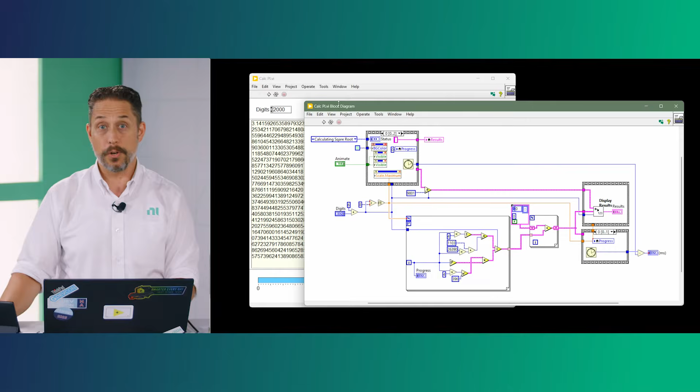Now, this was someone else's code. It's relatively cleanly made, but I didn't know how to necessarily interpret it. So I figured, hey, let's go to Nigel and see what Nigel has to say about what we've got.

So if you're a LabVIEW developer, the thing that you want to be able to do, if you bring up context help by pressing Control-H as a hotkey, you should be able to see here very easily we have a discuss with Nigel option. So when you click on that, you'll see that Nigel does show up.

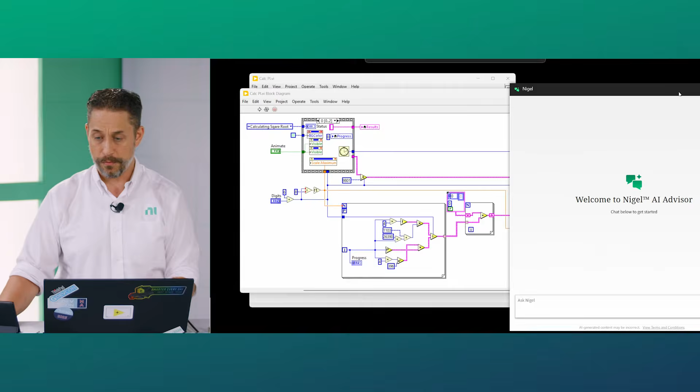It will log in automatically if you've already done it before. And now you can see that it's starting to chew on the VI that you're working with. And that's a great capability. That's truly differentiated. You're only going to get that with Nigel. And so it's going through the code, it's uploading it, and now it's starting to analyze the different parts and pieces of that individual algorithm.

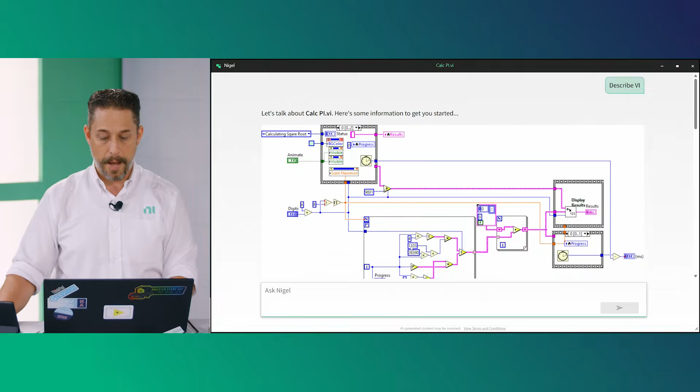You may have seen this before at NI Connect, but I really wanted to call out some of the unique things it's doing, because it's not just interpreting the names of the controls and indicators and other things like that. It's actually thinking about what the code is doing. One section that's particularly interesting is where it figured out what type of algorithm we're using to calculate the many digits of pi. This isn't a presentation about the different algorithms available, but that really impressed on me the level of thought happening in the interpretation of your LabVIEW code, which should make your life a lot easier as you start to use tools like Nigel.

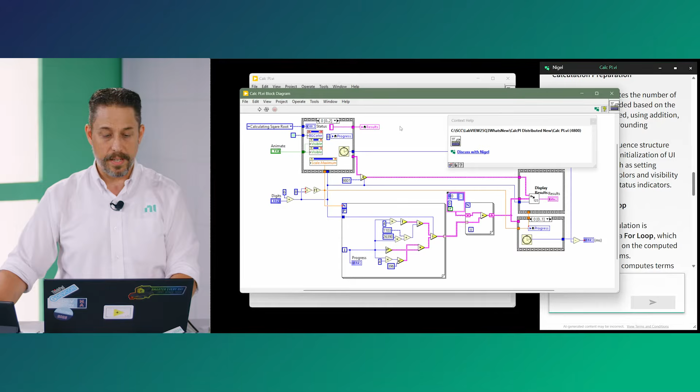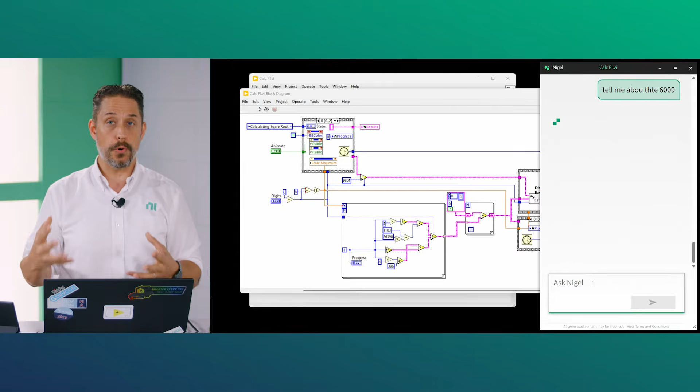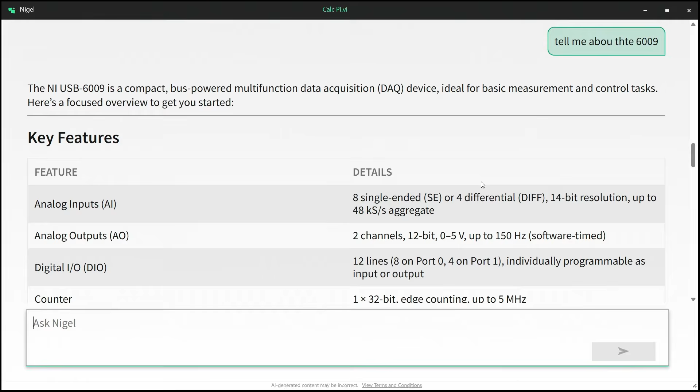Some other things Nigel can do: not only can you discuss the specific VI, but you can do something as simple as asking, tell me about the 6009. It will figure out, well, I'm an NI person working with NI products, and the 6009 has some relevance. In short order, we'll see a display that starts to talk about the USB 6009 as though you had actually gone to ni.com and searched for those results. Now that Nigel's finished calculating and figuring out what we meant by such an obtuse question, you'll see it figured out we were talking about the NI USB 6009, its features, and went from there.

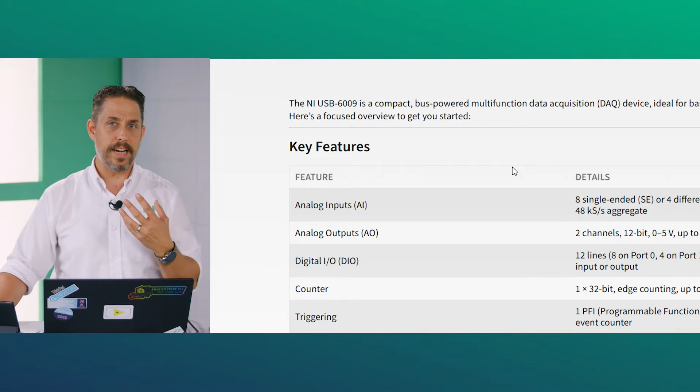This is just another illustration of what Nigel brings to the table above and beyond your typical chatbot, bringing a lot of value to those using it. Another unique thing about Nigel is that it's going to continue to get better quarter to quarter as we release new software and continue updating the algorithms and overall model available on the web. So stay tuned, continue to use Nigel, see what works well, and expect it to keep getting better at a rapid pace, much like most of the rest of the world of AI chatbots.

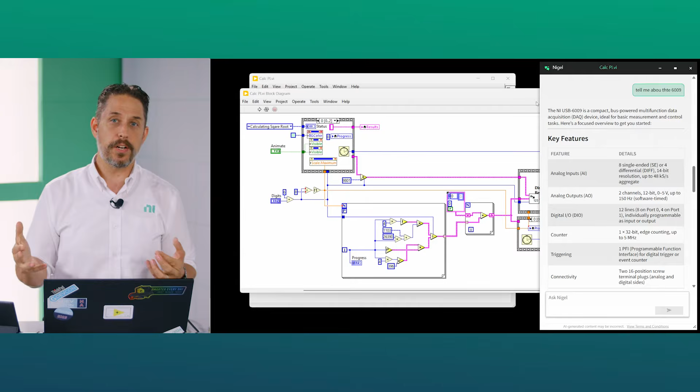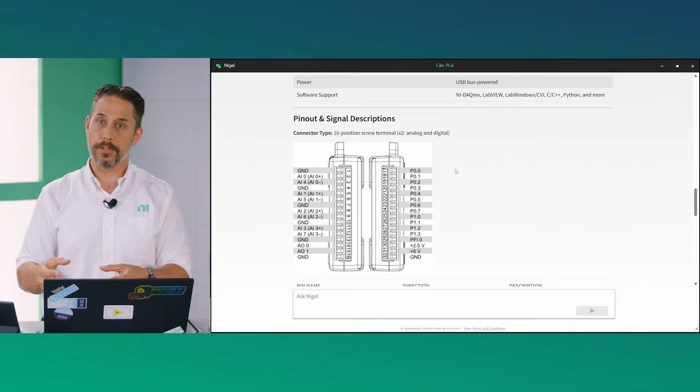Now that Nigel has finished figuring out what we implied by some random numbers, you'll see it quickly identified that the 6009 is an NI product and starts to talk about things. Some other interesting capabilities: it even goes through and tells you the pinout of the individual device you've got, once again accelerating the time to get the job done, use the hardware you've got, and use the software. Nigel is made to work with LabVIEW, made to work with TestStand, but also made to work with test and measurement at large, or the NI hardware platform.

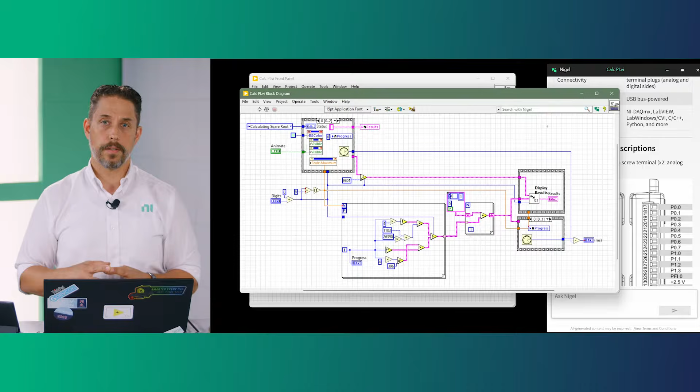The workflow I've shown you so far is basically asking about an individual VI or bringing Nigel to the forefront. But one other thing worth noting is that on the diagram, we have a search bar up here. So if you're somebody who works with Python and want to understand, hey, where's this common function, Nigel understands what you're talking about and connects you with parts of LabVIEW that match what you're looking for.

A tuple is akin to a cluster in LabVIEW, so if you're talking about that, you can see we have some very specific things that LabVIEW has called to the forefront. If you hover over an individual element, it will give a little bit of the rationale for why that item was chosen. It's just things we're trying to do to connect you to Nigel within the environment and get you to whatever operation you're looking for.

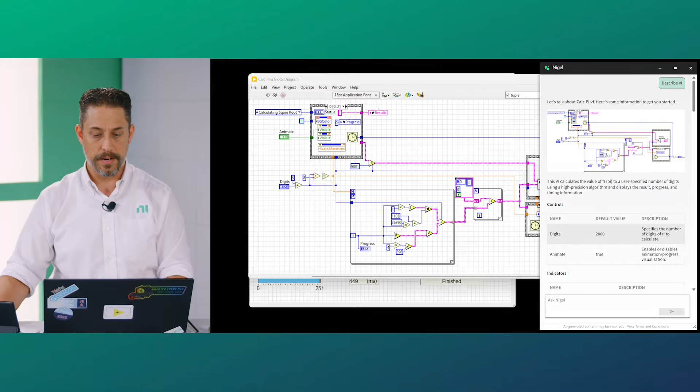So now that we've talked a little bit about Nigel and how it can help you understand individual code, how it's thinking about what you're doing and your code base, and even getting you to examples, we're going to talk more about accelerating the developer experience. Years ago, we introduced Quick Drop to the LabVIEW language so you can pretty quickly press Control Space and start to type in something like 'for loop', and start to add something to your overall diagram.

With this latest release of LabVIEW, we've added Quick Open. If I press Control-Shift-O, you'll now see that I have the ability to open something quickly. This will scan the project contents that are already open, and recent files and recent projects, so that you can save a little bit of time from having to navigate your disk or navigate a menu.

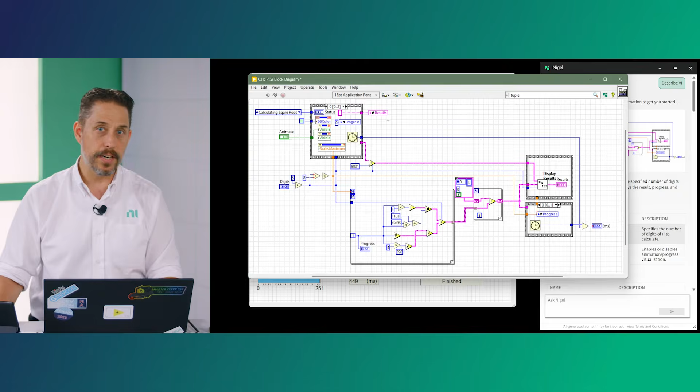So if I just type in Q3, it's going to show me a filtered list of things, and now I have the project appropriate for what we're working with here. Go ahead and hit enter, zoom back out, and in just a moment you'll see the project will end up loading. Let's go through and evaluate another scenario that's very helpful for the quick open feature.

So I have an application here that's actually an Actor Framework application. It's one of the shipping sample projects, and there's a lot of libraries, a lot of content here. But I know exactly what I want to get to - most of these projects have a VI called launcher.

So in the same manner as before, I'll press Control-Shift-O, I'll put launch - if I can spell it right, there you go. And so with a little bit of effort, you can see I now have three different things. I can see the library, I can see the individual VI, and I can go ahead and open up the splash screen that will get me to the relevant information.

Now you see that unfortunately my VI automatically had an error pop up. This actually brings me to something we'll talk about a little bit later in terms of automatic error logging. But before we get there and talk about errors, let's talk a little bit about what we need in terms of debugging.

So if I'm going to go through and have an individual VI that runs, debugging is a very typical existence that we as any programmer live in. And so what we want to be able to do is highlight some of the new features that we've put into the debug window.

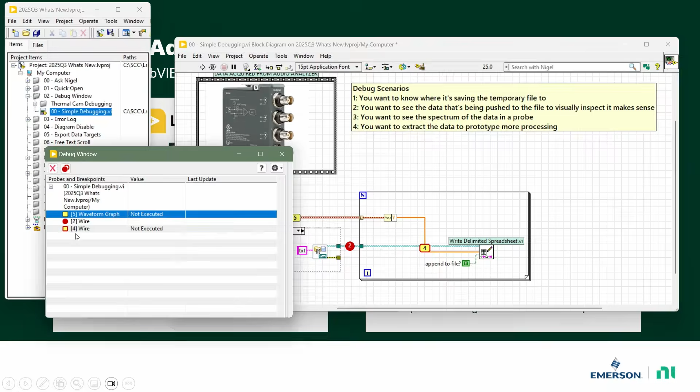Previously within LabVIEW, you had a window for your probes and a window for your breakpoints, but now we have a unified existence where I can set a number of individual breakpoints across my code, and I can also go through and set probes on multiple things. So now within the probe window itself, you can see we have the ability to look at multiple of them there, all within that same unified display. Once again, ideally accelerating the time it's going to take for you to do your debug.

Now, we didn't just unify those things - we also added a lot of features to this window that ideally are going to help you out. So now that we've got a unified experience, we've also given you more than just the ability to see them together. We've given you the ability to go ahead and even do something as simple as rename.

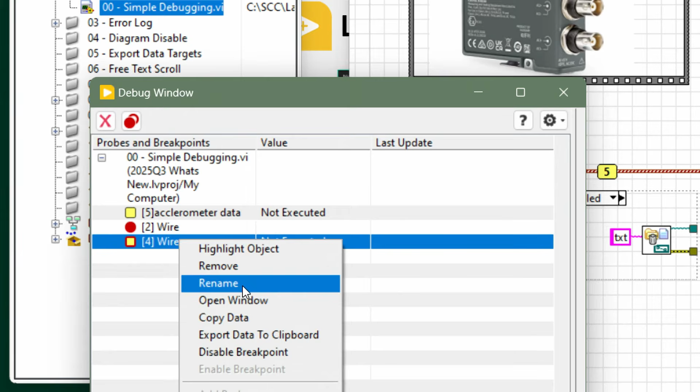So this is accelerometer data, and let's see what wire 4 is. You should be able to right click and highlight the object, and then you can see that it's there - oh, that is the current data. So let's go ahead and rename that one - once again, current. And so ideally you're already having an accelerated experience in a more complicated scenario than this.

But even something else I find very useful is that we have the ability to show the probe display for an individual element. And if I go ahead and run this VI, you're going to see it's going to break point. We're going to step through and step over these individual calls. And now that it has run, you can see we have the data stored in an array.

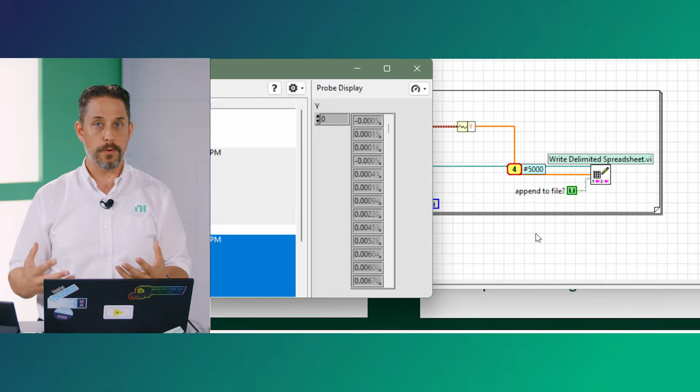And so that's valid, it's valuable, and we could do something even as nice as right click, and we should be able to export - let's see if I can zoom in there. We have the ability to export that data directly to clipboard for you to paste in some other application, or to even export data to Excel. So if I go through and click on that, it'll take a moment for Excel to load, but you'll see it open up, and then my data will be stored there for whatever other purposes you like.

Now, normally the reason somebody would go through and show it in Excel is just for the purpose of plotting that tabular information. But once again, we're LabVIEW developers - we don't have to do that type of operation.

So how do I go through and very quickly change this data set to something that I can see? Well, with the new debug window, we now have the ability, if I can go and scroll in here, to change to a variety of different types of probes on the fly without having to destroy and recreate a custom probe. And so if I were to go ahead and just click on Real Double Array Probe, you'll see that now I can see my data stored as a waveform.

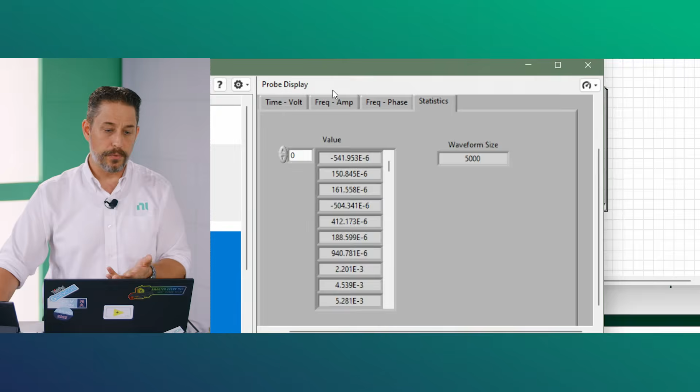I can look at it as the spectrum of the information, or even just that raw information and some other information as well. Now this is a custom probe that I made, but really it's just a VI that takes that same data set and shows it in different fashions. And you can go through and experiment with what's here, or go ahead and create your own new custom probe.

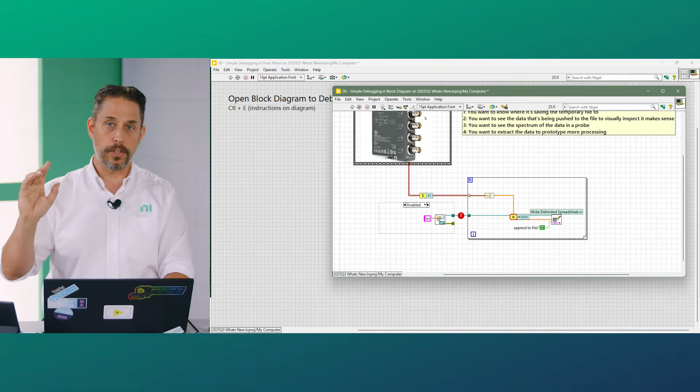Now, some of the other things within the probe window that are really useful, especially in a complex scenario where we've got a lot of things open, is the ability to invoke it via hotkey. So just by pressing Control-D, that will now bring that to the forefront. Or if you like the behavior that we had before, if you click the gear, we now have the ability to either hide or show the probe display. We can go ahead and keep the window on top.

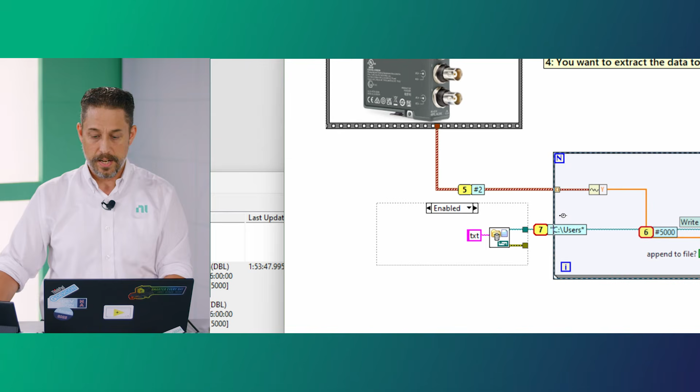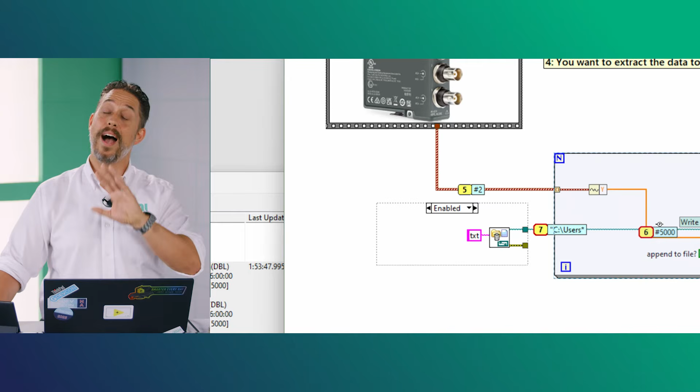Or one of the other new features is the ability to show the value on the wires. And so if I were to go ahead and do that, you'll see here very quickly, if I add a probe to my path and I run this, you'll now see that it has a bit of information associated with that. Now, in this case, it's a path that goes too far, but even the ability to see information on the probe or on the wire without having to turn on execution highlighting is very useful.

Now, in the world of debugging and just creating code, you're going to run into errors. A feature that's been in LabVIEW for a long time is automatic error handling. So if you have an unwired error on a method, and something happens, it will prompt you with a display similar to this. So I have a simple application that I'm working on here. I'm working with a thermal camera and a microcontroller that's communicating with LabVIEW.

And if I run this individual VI, you'll see that we have a problem. The onboard temperature sensor is failing. And so there might be some kind of issue. But the problem is, if I just hit continue or stop, there's no indication as to what that error was. And up to this point, you would have completely lost it. Well, in 25Q3, we now have the ability to automatically log those errors to disk.

Now, within my project I actually have an auto-populating folder that links to the LabVIEW data unwired errors directory. And so now I should be able to double click on that, and it will show me all the unwired errors that have happened in my application. You can see that I now have my last one that happened, and I can get information about which VI specifically caused it and when it happened. Although it's not all the information about the error, ideally it's going to give you more insights than just the fact that an error happened and disappeared.

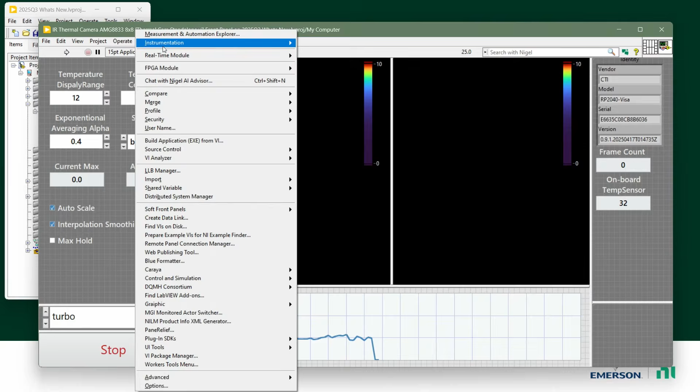And so when you run into these errors, if you want to see where they're being saved, or to turn it on and off, you should just be able to go to the Tools menu and Options, and then if you scroll down the block diagram category, you should see an error handling section where you can get more information about where that file is, or conditionally turn on or off the actual logging.

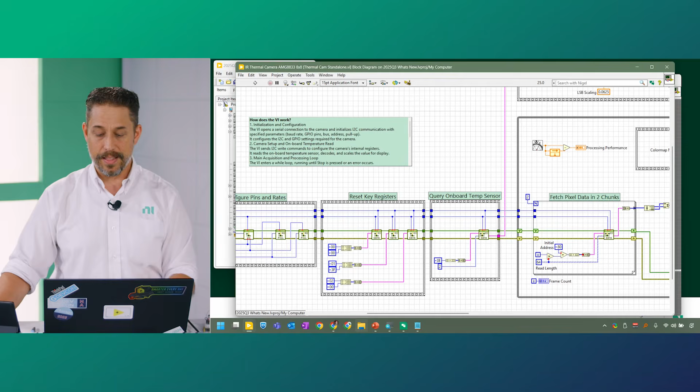Okay, well, now that we have an error within our code base, and there's something wrong with the onboard temperature sensor on my thermal camera, let's go ahead and comment around that. And that brings us to our next feature, a great one that I love: diagram disable. Now, within most languages, you have the easy ability to just comment out a chunk of code by adding a // or a /*, or whatever your language needs.

Well, within LabVIEW for generations, we've had the diagram disable structure, where you can go through and select and comment out a section of code. And now this wouldn't run anymore.

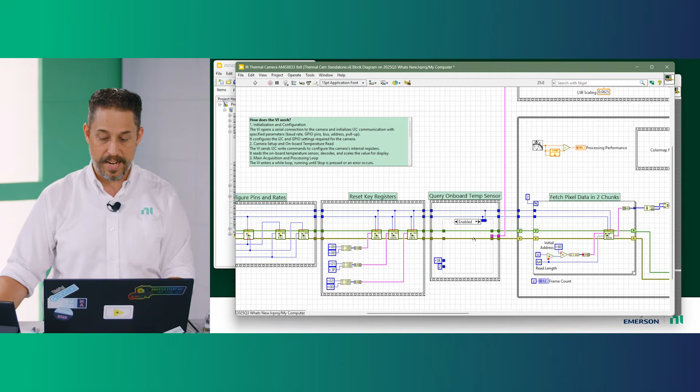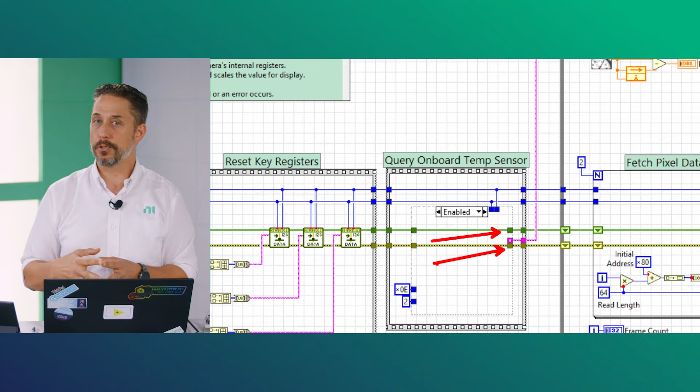Well, up to this point, what would end up happening is the enabled case, you would no longer pass through specific data flow items. Well, within 2025 Q3, we've enabled a little bit more intelligence within the diagram disable structure to determine whether or not data flow needs to be preserved or can be preserved for that chunk of code. Once again, saving you development time during that rapid iteration process that LabVIEW excels at so well.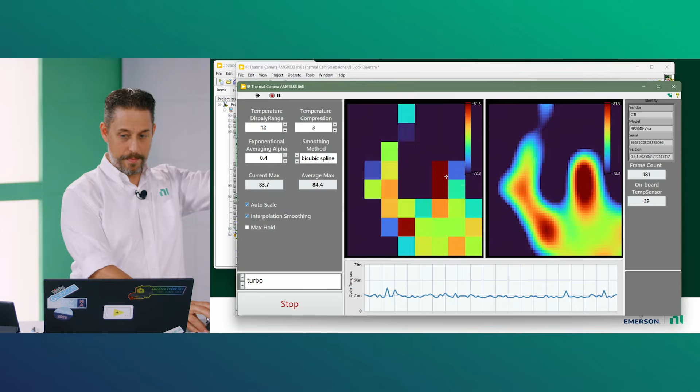So I hope you like that one. That's absolutely one of my favorite features. I think it was Jim Kring from JKI who had officially requested that from the Idea Exchange. And so now that we've disabled that section of individual code, we should be able to run this, and now you should be able to see, hey, there I am in the background testing my thermal camera, and I'm up and operational again.

Peace. Okay, so we're gonna step back to calculating pi for just a brief moment in Nigel. Now, Nigel gave us some great insights, and so what we wanna do is capture that and have that saved on the VI. So this is gonna highlight one of the newer features on the block diagram. So if I wanted to just copy some of those specific parts of the code and put it on the block diagram and paste, you'll see that it's a rather large chunk of code.

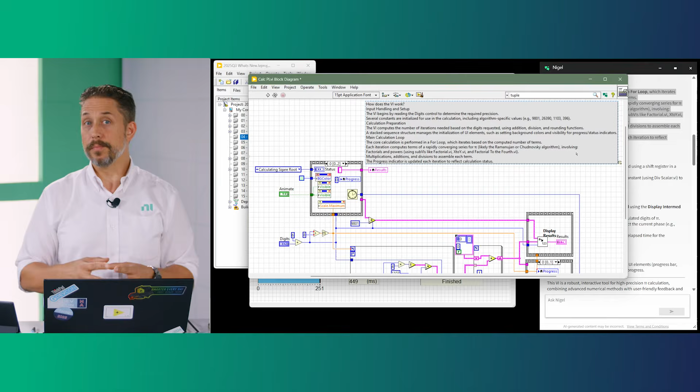And so now that I've got it on my block diagram, you can see it's a little bit larger, but one of the new features that we've got is on free floating text labels, we now have the ability to automatically have a vertical scroll bar associated with the text itself, and you have the ability to scroll through those individual portions of code, which is very useful if you want to leave some verbose documentation, but not occupy a very large portion of the block diagram.

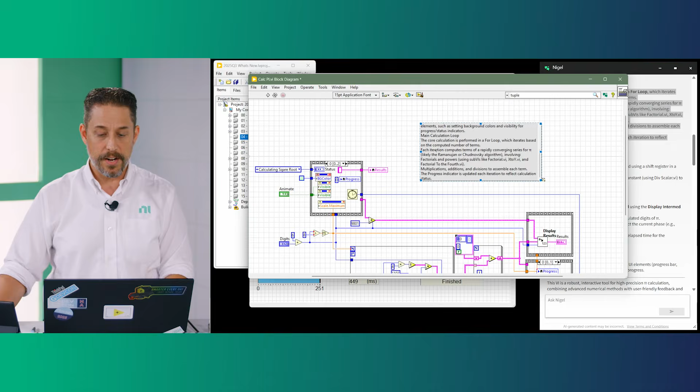Now, speaking of free-floating text, another recent change is if you happen to be within an individual free-floating text and you press Control-A, instead of selecting all elements on your block diagram as we used to, it now selects all elements within the free-floating text box itself. Once again, these are small, minor things, but altogether they add up to a smoother developer experience, and that has been requested by the community.

That's absolutely where we're getting some of these ideas from, and trying to not only innovate with new things like Nigel, but also make sure that we're giving you the little things and the quality of life improvements that you're looking for. So continuing down the theme of community requested features, another one was the ability to have the text within certain nodes always aligned to the left. So let's go ahead and see what that looks like.

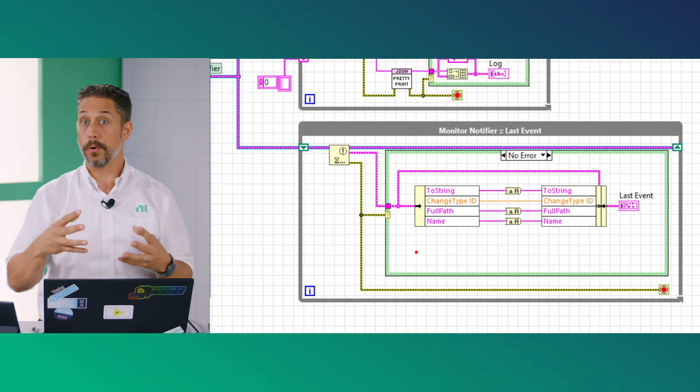Now I've got a simple VI here that's doing something that we'll talk about in just a little bit, but at the core of it, this is just a small illustration of what we've changed, where now we've left justified all the text within the individual nodes for bundle and unbundle, and a myriad of other data structure types on the block diagram, making your code easier to read for you or for other people as well.

All right, so coming back to our Pi example here, another feature that's in 25Q3 is an improved context help experience for when you're hovering over certain elements. In particular, let's hover over the multiply, and you can see that now we have new pieces of information in the notes section for certain VIs. We are in particular calling out whether or not something is reentrant, its reentrancy type, its execution mode, whether it's subroutine or something else. And there's more information that we continue to add here.

So in order to determine how an individual piece of code is expected to run, you don't have to go into the properties for that individual module. This is actually, once again, a community contributed recommendation from Mr. Jim. So thank you for that one.

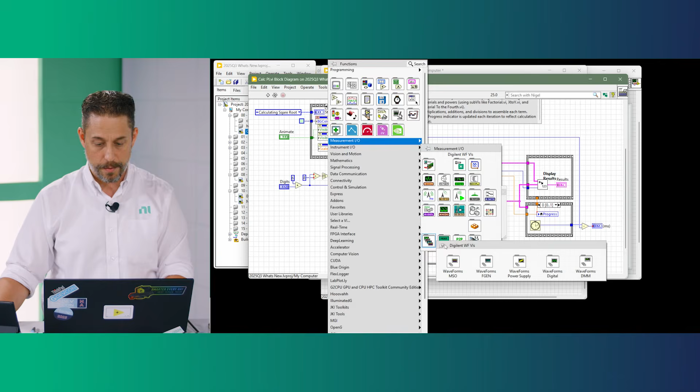Now, beyond just individual sub-VI properties, we also are showing more information about our call library function node. So if I zoom out here and I drop something on the block diagram, this is from our Digilent WaveForms, our academic line, and we're going to go into something that has a call library node on the block diagram. If I pull that up here, what you'll see as I hover over that node, something new shows up within this definition.

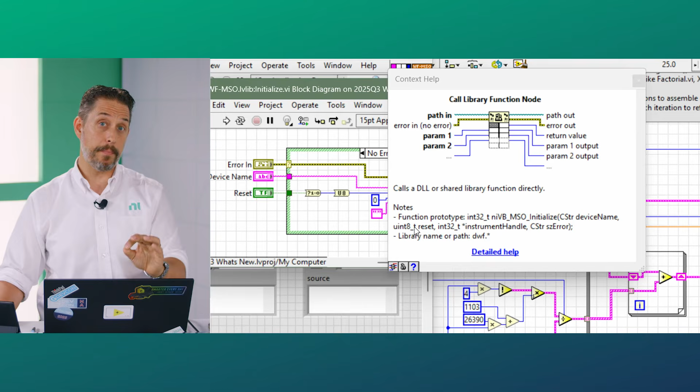What we're actually seeing here is the ability to see the function prototype that's being called from within, including the actual prototype of it, and then also the path to the individual DLL. Now, in this case, if it's a system level DLL, you're just going to see the shorter path to it. But once again, instead of needing to go into a dialog to try to determine critical information for your application, we're presenting it to you in the context help window.

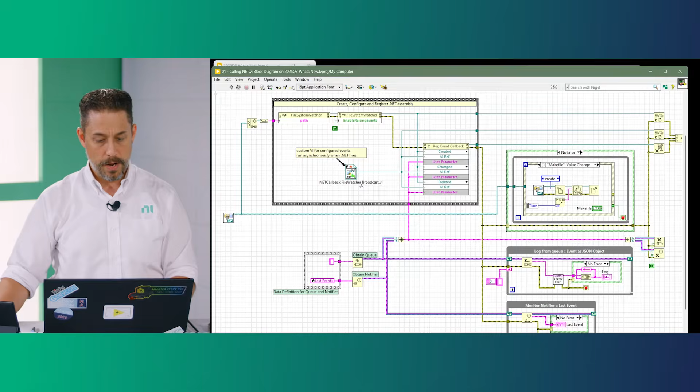So within LabVIEW 2025 Q1, we talked about how we were now able to call into .NET Core, whereas previously it was just .NET Framework. And we were able to call the methods and properties, but we couldn't do callback events. Well, with 2025 Q3, we now have the ability to register for specific events, just like you used to do with ActiveX back in the day, or what you could do with .NET Framework.

And so we're continuing to try to reach parity with .NET Framework, and there's still work to be done in that area, but this is definitely a huge improvement to allow you to use .NET 8 Core and other core-based .NET implementations, 8 and 9 and so on into the future.

All right, so let's pivot out of the diagram a little bit and talk about the improvements that we've given to sharing code or working with others in your team. A common tactic or tool to use when you're sharing your code with someone else is to use a source distribution. And we've made updates to the default behaviors on source distributions in this release.

In particular, when you have a source distribution and you go to the additional exclusions, we now have set the default behavior for whether the compiled code is included as you give someone your code. It used to be it would separate the code, but now we just have it adhering to whatever you've declared in your project, giving you a little bit more control or expectation of how this is going to go.

Now, speaking of source distributions, it's not uncommon that when you go to share your code, you're going to put it in a different location. And it used to be an issue if the length of your path during distribution went beyond 255 characters. In this case, you can see that I have a path here that is egregiously long, but now with LabVIEW 25 Q3, that's no longer an issue. It naturally and gracefully handles path lengths that extend beyond that 255 character limit, whatever your directory structure is during that distribution process.

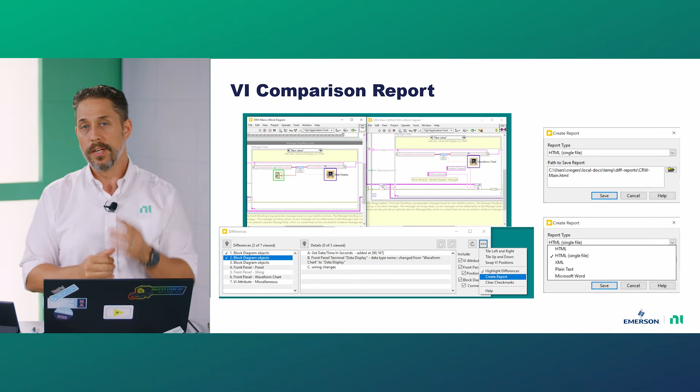The reason this matters so much is that if you are working in a software engineering practice where you're doing continuous integration and deployment, you want to be able to automatically create these reports to go along with your pull request or other things as you're checking them into source code control. So the ability to have this instantiated not interactively, but programmatically through the command line interface for LabVIEW should be good news to anybody working in those software engineering domains.

So within our investment in best practices in software engineering, we've also enabled LabVIEW to be run within a Docker container. For those of you invested in software engineering and continuous deployment, this is going to be great news because now you can have workers spun up or shut down without having to have a pool of virtual machines, and you can go to hub.docker.com and search for the LabVIEW image that's there and see if that works for you.

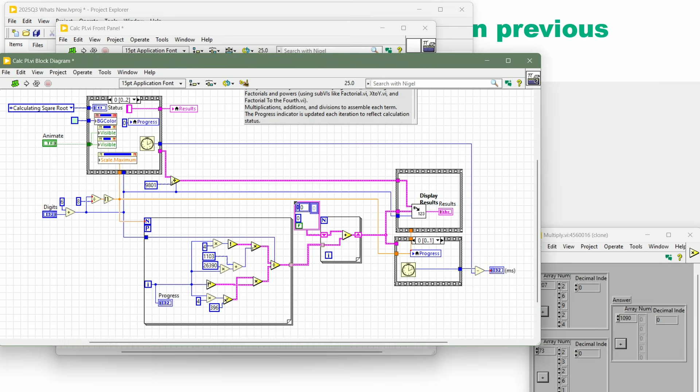So if I were to go back into LabVIEW and double click on one of the icons and bring up the editor, let's say I wanted to change the border for some reason or experiment with it. I'm going to put a big red border around the outside of it just to see what that looks like. And very quickly I determine it's not. Well, the community decided that if I press escape, I want to automatically start to exit, and I'd like to be prompted whether or not I want to save or commit my changes.

It's a seemingly simple thing, but it actually has given us at NI the ability to flesh out all of those workflows to determine, hey, what works? How fast can we do these pull requests? What's the CI/CD process? And iron all of those parts and pieces out. So something very simple as an icon editor has led to a great improvement in all of these things.

All right, so let's wrap it up here. Hopefully that made it very clear that NI is trying to re-engage with the community and investing time and resources. And that includes the idea exchange. Many of the features that I talked about previously, I was mentioning some of the community members that had recommended them. For anybody that I forgot, I'm sorry. You can hit me up on Discord and let me know that I forgot your name, and I'll give you some kudos there.